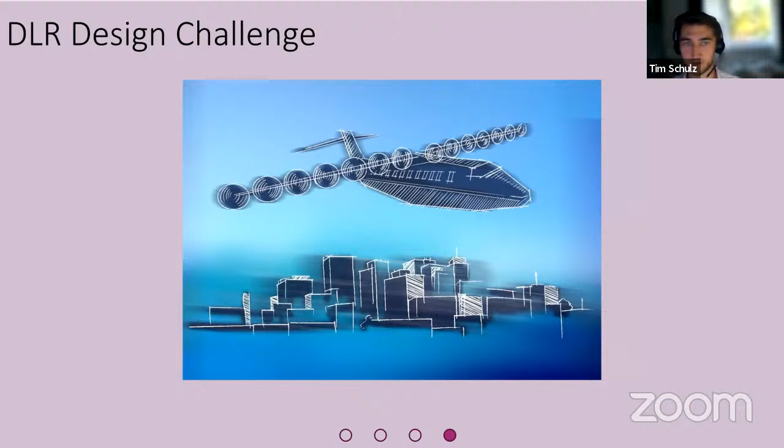A few years later, they had to design a rural aircraft to transport 6 to 10 people to slightly larger airports. Last year, students had to design a drone to regain internet connection in catastrophic areas. And as just introduced, this year was all about regional and short-haul design, which brings us to our solution.

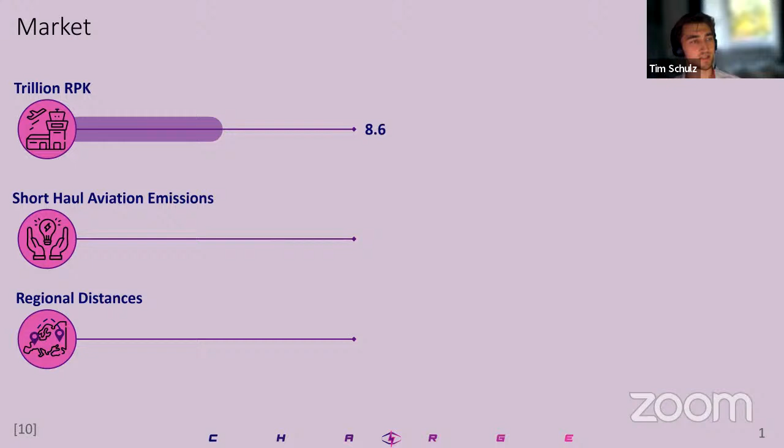Before we started to design a new aircraft, we had to figure out if there's any market for it. As stated last year, the aviation industry is still kind of recovering from the COVID crisis but will handle the challenge with ease, and is expected to reach about double the revenue passenger kilometers by 2050 compared to last year — plenty of market for us and for aircraft.

That just leaves the question: what market exactly? One of our main focuses is climate change, and roughly one-third of all aviation emissions are emitted on short-haul and domestic flights, often covering less than 1,000 kilometers. That's about the range you can see here on the map.

An example network for those ranges was provided by this year's DLR Design Challenge, and you might notice some routes extend far beyond the 1,000 kilometers just mentioned. Northern Germany is quite rainy and dark, and the winter isn't that nice, so it's tempting to go south to warm Italy. But it's hard to design an aircraft for such a variation of ranges.

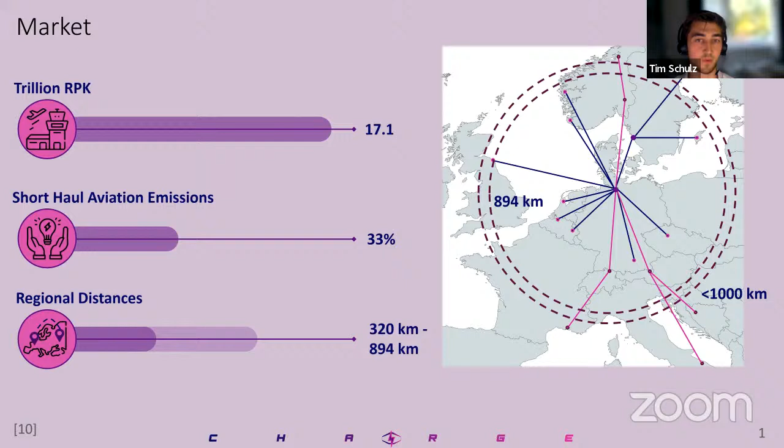Which is why we were allowed to consider stopover flights, reducing the actual required range to about 900 kilometers — roughly the distance of Hamburg to Edinburgh. It's noticeable that for all those ranges and routes, the DLR provided within the task an amount of route demand and a minimum and maximum amount of takeoff and landing slots at the airports, which predetermined the aircraft to about 60 to 120 passengers. That's going to be important later on.

But first, let's go back to the routes — and how are we going to fly those climate friendly?

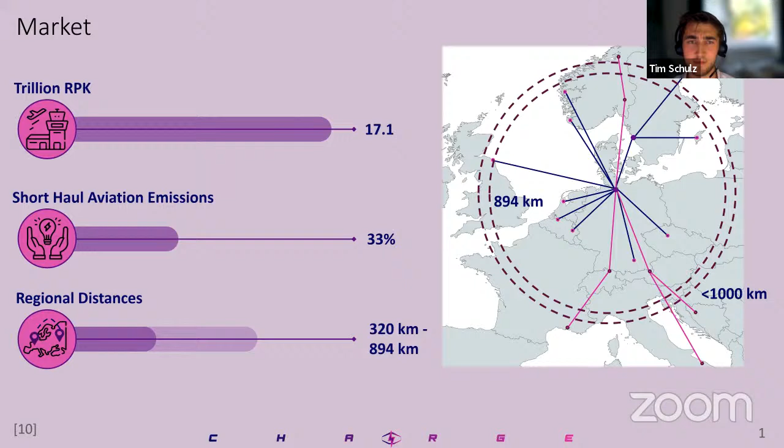It's prognosed that by 2050 air travel will increase, and sadly the greenhouse emissions will roughly double. So it's one of the only sectors that by 2050 will actually have a growth in CO2. But the EU is trying to combat that.

By 2050, the EU wants to use 70% sustainable aviation fuels for air travel. There's a legislative act called the Refuel EU Act, and according to that act, only hydrogen and sustainable aviation fuels are considered CO2 neutral. But it's still only 70% of sustainable aviation fuels. So by 2050 and after that, commercial aviation in the EU wouldn't be exactly CO2 neutral.

If you look at another energy carrier, namely electricity, it's prognosed that by 2050, up to 94% of energy generation in the EU would be renewable, so with a very low CO2 footprint. So it can be assumed that by 2050, electricity is a good source for CO2-free energy.

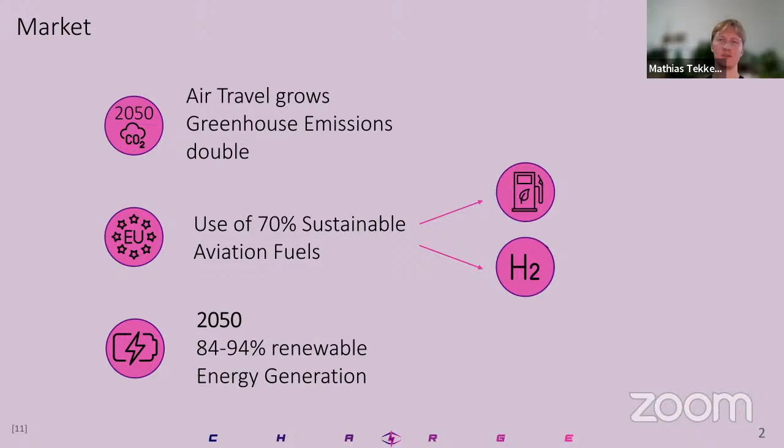Let's also look at the efficiencies of these energy carriers in more detail. In the assignment, we were given to use either SAF, hydrogen, or electricity. On the left side, it shows the total grid-to-shaft efficiency of these energy carriers. It's noticeable that sustainable aviation fuels have quite a low energy efficiency of up to 20%. Hydrogen is marginally better, up to 30%. But battery electric is the most efficient with 77% total efficiency.

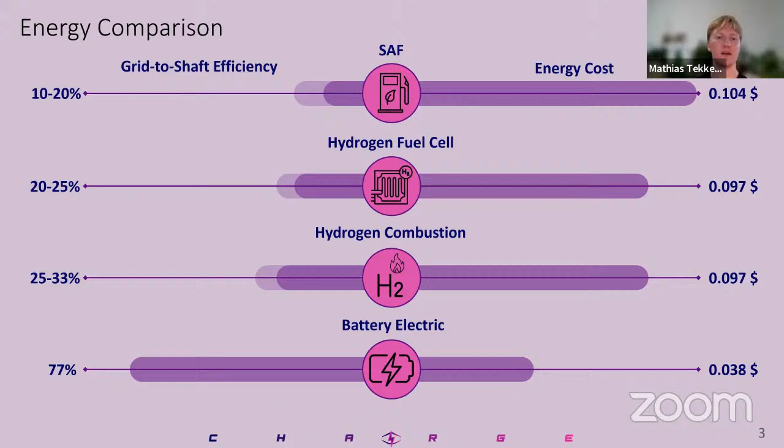Also, when looking on the right side for the energy costs that were also given to us in the assignment, it's noticeable that battery electric is almost a third of the price of hydrogen. So in combination, it's an energy carrier that has high efficiency and also low cost. So we were also asking, what do we need for energy, for battery electric flight? What is actually technically necessary?

To answer that, we used the Breguet approximation formula to calculate the final MTOM of a battery electric aircraft, depending on the usable specific energy of the batteries and also the empty mass fraction of the whole plane. On the left side, you see the 3D diagram of this. It's noticeable that at lower usable specific energies, the MTOM increases rapidly. This is explained simply because the mass of the battery increases, and you have to compensate this increase with a further increase - it's just a slippery slope.

To combat this, we limited our design to 40 tons final MTOM and assumed that the empty mass fraction would be around 50%. From there, we deducted that the minimum usable specific energy for our battery packs should be 700 watt-hours per kilogram, and the feasible empty mass fraction of the aircraft is at 50%.

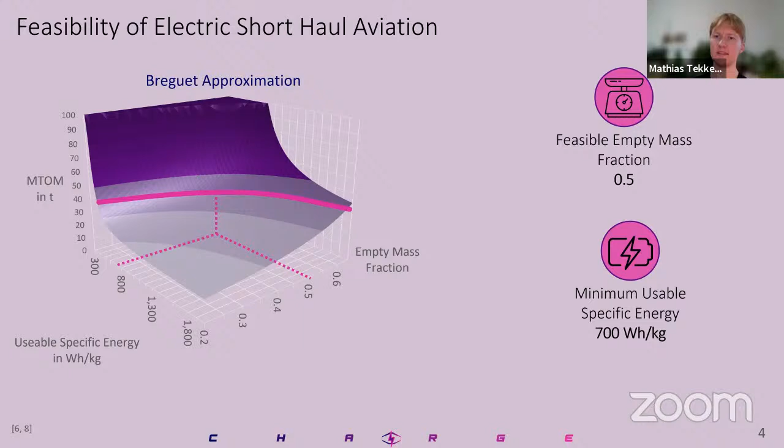But the task wasn't to design an aircraft for today. It was for 2050. And by 2050, the outlook is quite different.

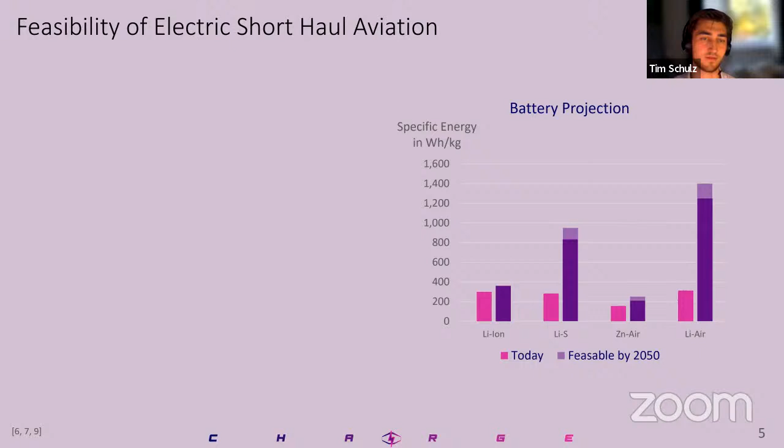Well, for once, there's lithium sulfur. Those batteries aren't far enough developed by 2050 for our aircraft. But there's another alternative, lithium air. Those batteries bind oxygen from the surrounding air while emitting energy and are expected to reach up to 1400 watt-hours per kilogram of specific energy in the battery cell by 2050, which is far more than we require for a feasible battery electric aircraft. So to come back to Matthias' question from before, what is necessary for a battery electric aircraft? Lithium air batteries, and they will be there by 2050.

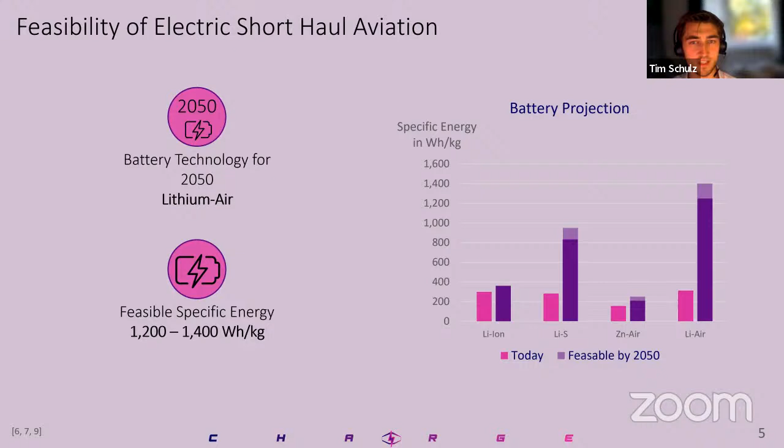So this is why I can introduce charge.

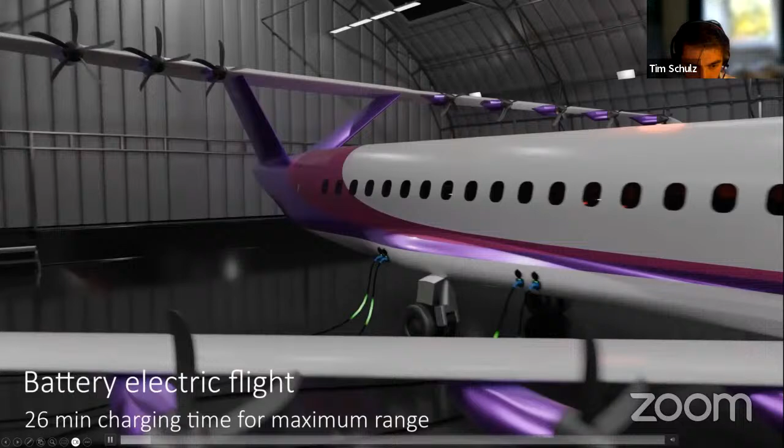Oh, I'm sorry. So I think now you should.

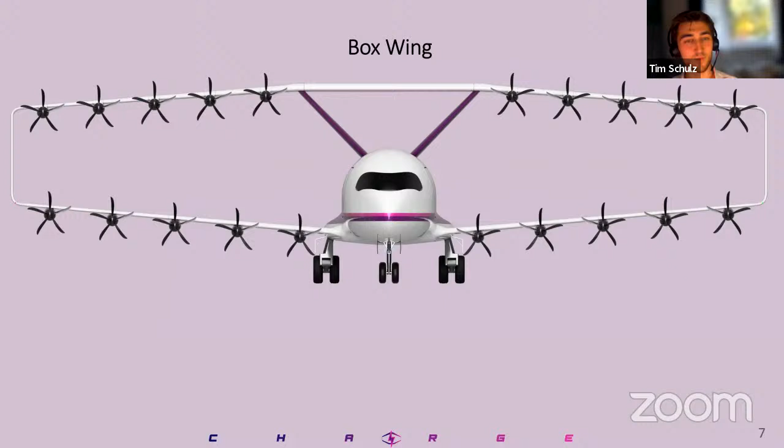Charge is our carbon neutral, high efficiency aircraft for regional electric flight. The marvelous design is characterized by a futuristic looking box wing, which on one hand provides an excellent in-flight efficiency, but on the other hand, keeping the wingspan quite low.

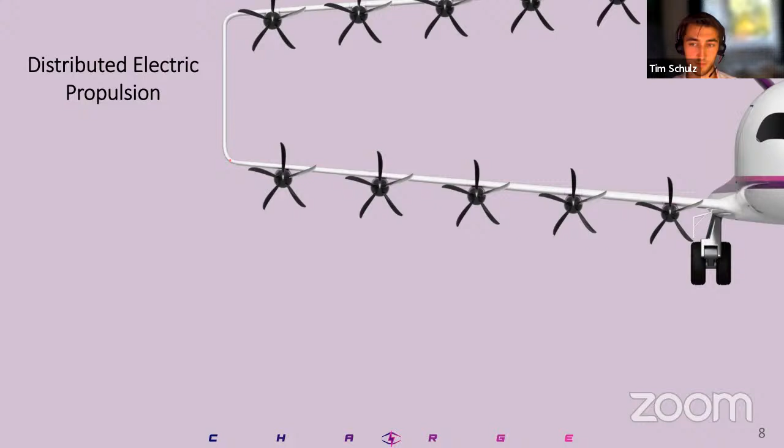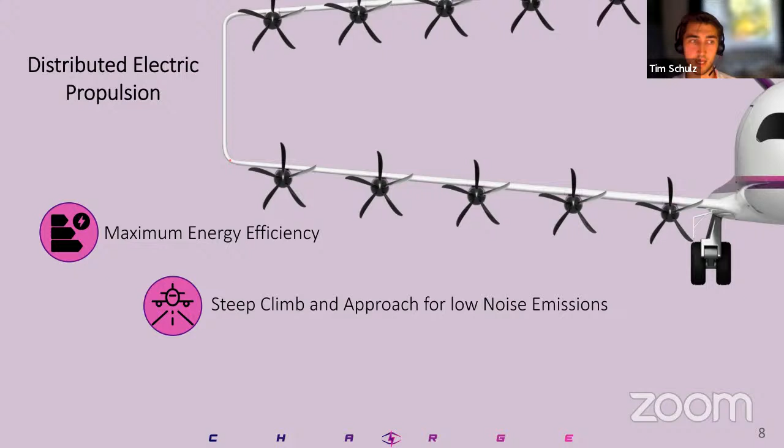Along the wing's edges, spread out 20 propellers, providing us with distributed electric propulsion, which leads to a maximized energy efficiency, even during climb and approach, which we do quite steep to reduce noise emissions as far as possible. And since we're using electrical motors, they don't require much maintenance and can cut some costs in this department.

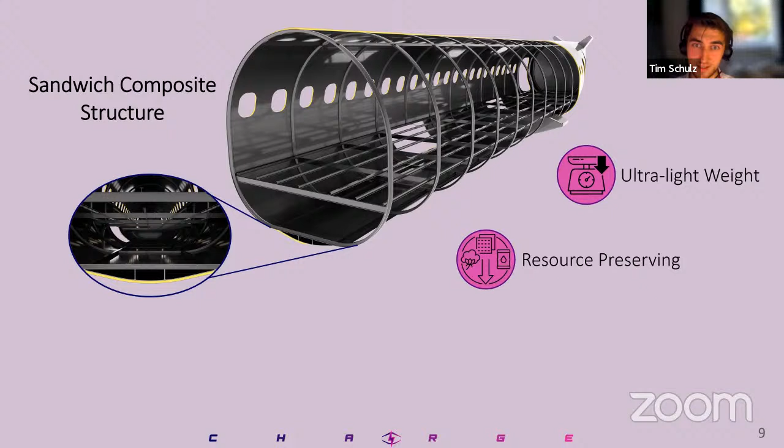Strapped to the wing is our fuselage, built with a sandwich composite structure, which is ultra lightweight and preserves a lot of resources. And if technology is ready by 2050, we are opting to enhance or even substitute as many carbon fibers with natural fibers as possible to reduce waste, further reduce emissions, and protect the environment as much as we can. But those are just some empty words.

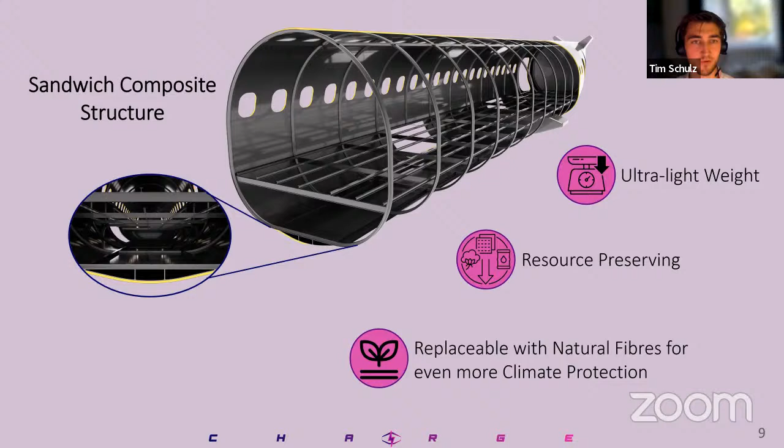We're engineers, of course. We calculated why Charge is so ideal for its use case.

As mentioned before, we were not given a specific configuration for the aircraft, but rather a route network and the amount of passengers we had to serve. Based on that, we could have a configuration between 60 or 120 passengers in each plane. The question was, how do we calculate the perfect design for this design mission?

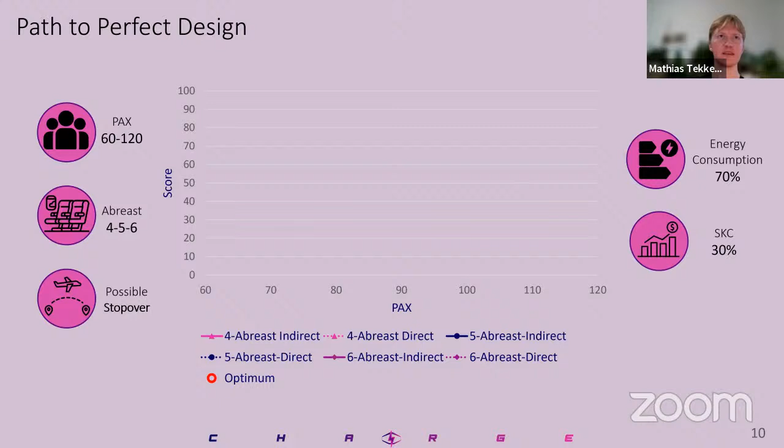We also developed a scoring system to score the configuration. We weighed energy consumption with 70% and the seat kilometer cost by 30%. And in the final configuration, the most efficient was a 110 passenger configuration using the indirect flight network.

It's also noticeable that there are two trends on this chart. Firstly, with the increase in passenger numbers, the scoring gets better as the aircraft is more energy efficient per passenger kilometer. It's also noticeable that all the indirect flight configurations with the max range of 894 kilometers have a way better scoring than the direct flight networks.

This can be explained by the increase of the battery mass that's required to fly the 1,400 kilometers compared to the 894 kilometers.

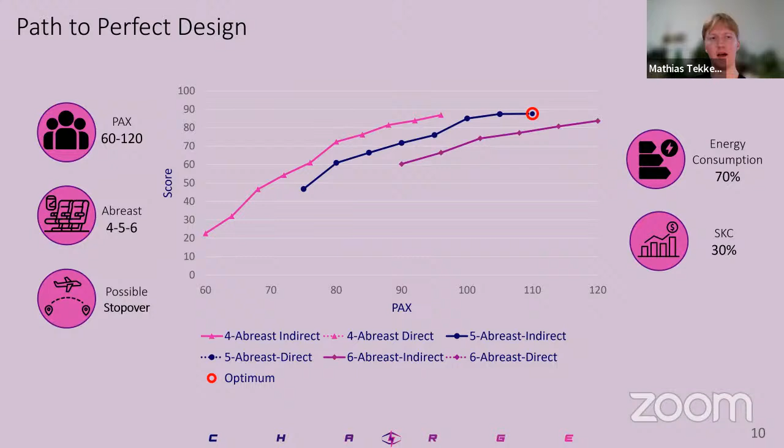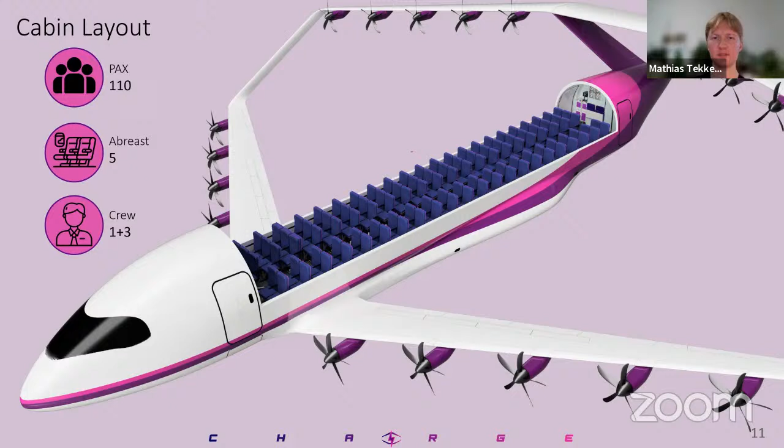Let's have a look how the airplane configuration looks like in detail. Here is shown a cross-section of the aircraft in 5 abreast, 3+2 seating order. In total, it can carry 110 passengers, and it has a capability for single pilot operations, so we only need one pilot at the front.

In the cabin, the aircraft would have 3 crew members to assist the passengers during their flight or in any emergency cases. Otherwise, it's quite a conventional commercial aircraft with a few galleys and a few bathrooms at the front and back.

But let's also look at the outside dimensions. Because of the box wing design, we were able to limit the wingspan to 28 meters. The aircraft is in the ICAO Aerodrome Category C, which is very useful for our flight network as we have to service smaller regional airports. Otherwise, the aircraft is roughly 31 meters long and just under 8 meters tall.

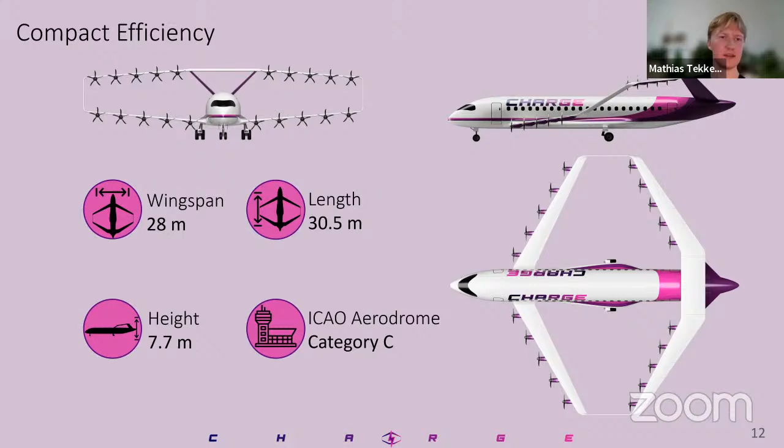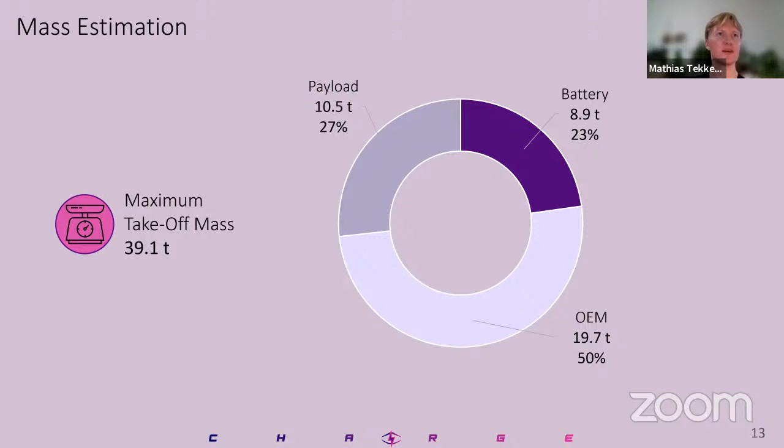When we look in more detail at the mass of the aircraft, we see that we did reach our goal of staying under 40,000 kg MTOM, as we tried to during our feasibility study with the Breguet approximation. Only a fourth of the aircraft's final mass is actually the battery, with roughly 9 tons. Interestingly, we also stayed at 50% operating empty mass, which we also assumed in our first approximations.

But let's look in more detail at the batteries. The batteries have a total energy density on the pack level of 1,200 watt-hours per kilogram. But if we consider depth of discharge protection and degradation, the usable energy density is 720 watt-hours per kilogram, above the minimum that's feasible for an electric aircraft design.

The lithium-air batteries are divided into 4 battery packs under the floor of the cabin, and they can be easily removed by openings on the starboard side. They can be charged over 4 charging ports, so each pack is charged individually. For the maximum range of 900 kilometers, it only takes 26 minutes to charge them.

The batteries themselves are quite safe as they cannot self-inflame, but each pack is still self-contained and also has an extinguishing system in case of emergencies.

We also took into consideration that every 1,500 full cycles, the batteries have to be exchanged as their charge holding capability falls below the requirement to fly the aircraft at longer ranges. But this is not a considerable issue as they can be changed every 23 months during the overall C-check of the aircraft and doesn't have any operational issues.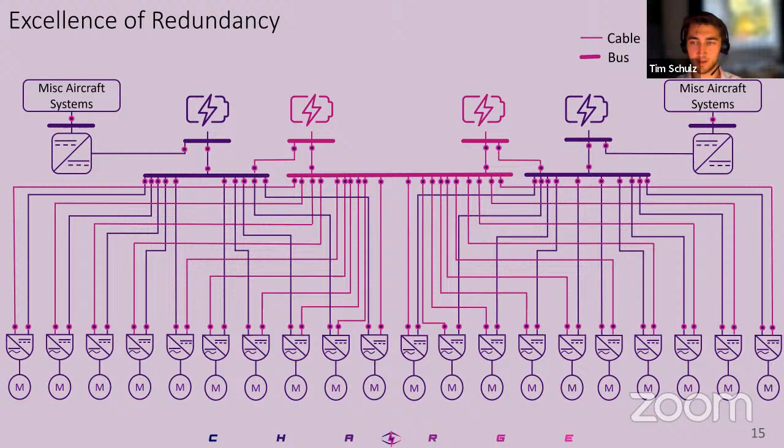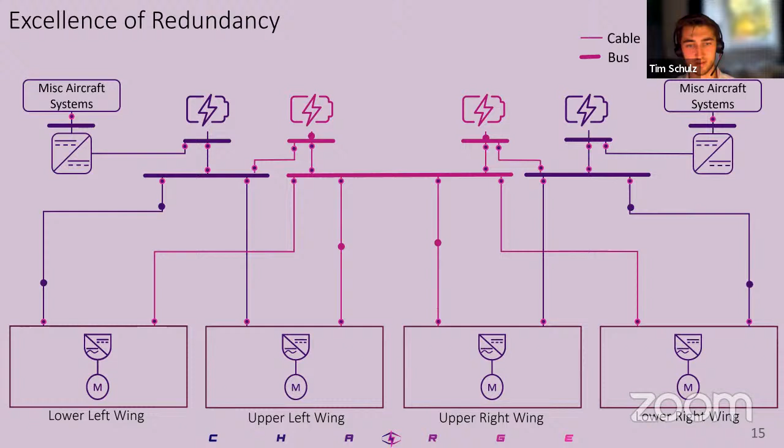Right now, we're assuming there's just one motor per wing, and let's see how it's redundant. Right now, every battery pack is powering its motors, since there are 4 wings, 4 batteries, 4 motors. It works this way. But let's just assume one battery fails. It's highly unlikely, but let's have a look.

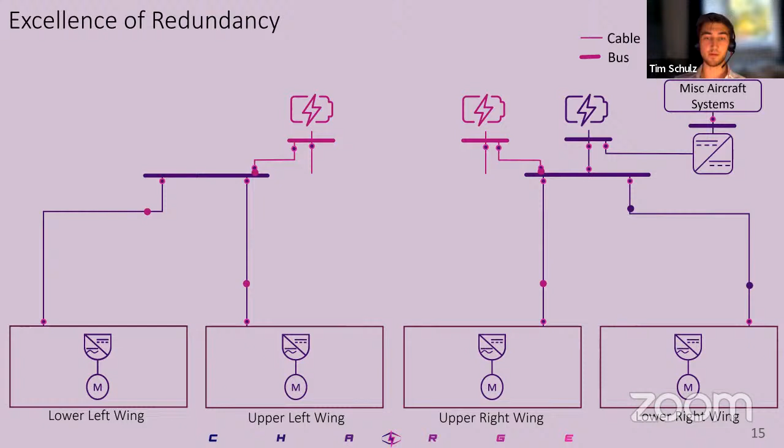Even if a battery fails, you would still be able to operate all 20 motors on full power. And in this configuration, we could even say the center bus fails as well, and we would still be able to operate Charge regardless of the damage, which makes us very redundant.

But let's have a look at Charge operation. While flying throughout Europe, since that was our task given by the DLR, with about 900 kilometers of range, we had to overcome some obstacles like the Alps, which is why we chose an initial cruise altitude of about 7.5 kilometers and a cruise speed of Mach 0.57. On the ground, we're taking off in just short over 1400 meters, thanks to the installed power of 6.24 megawatts, which enables us to operate even from the smaller airports, like the regional ones we had to operate from. And as just mentioned, our charging time is about 12 to 26 minutes, depending on the range previously flown.

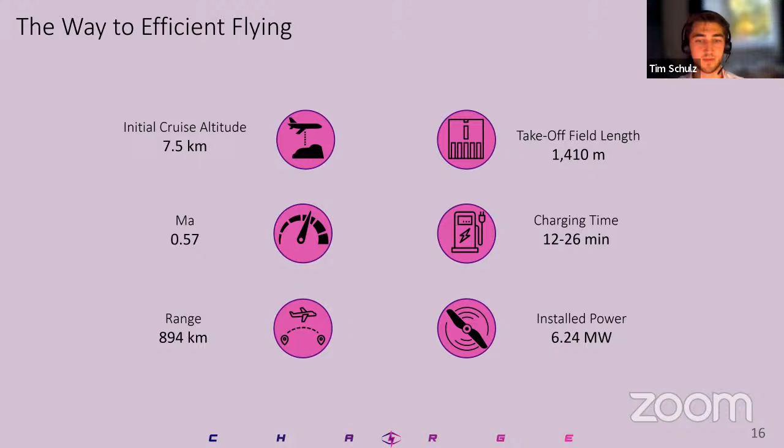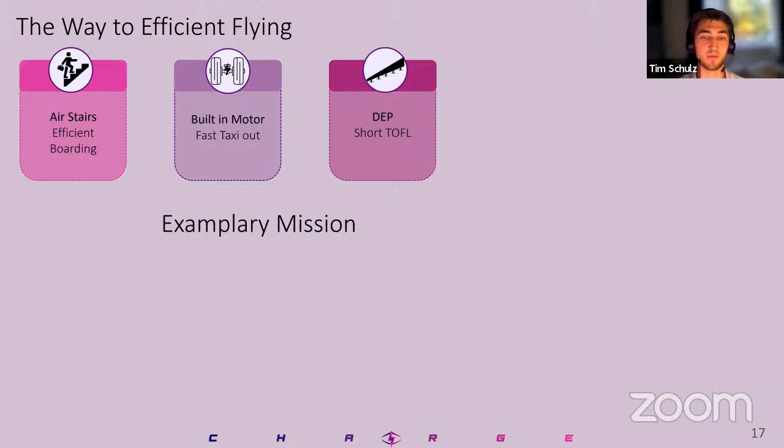In the air, we're very efficient. Economically, thanks to the single pilot operation, and ecologically, thanks to the very efficient box wing and the morphing tail section right in between the V-tail.

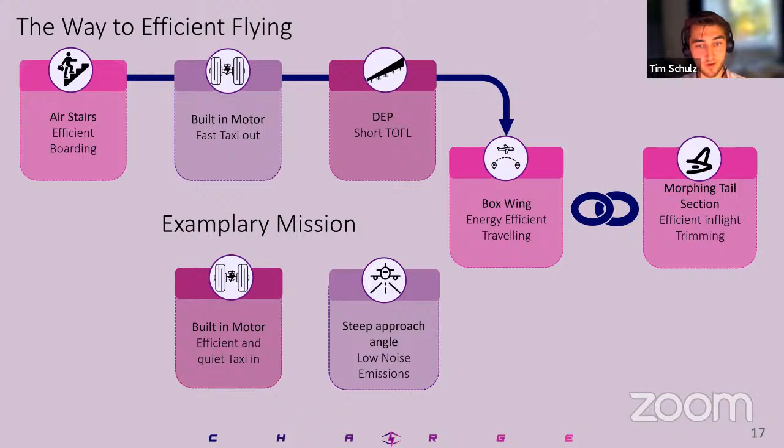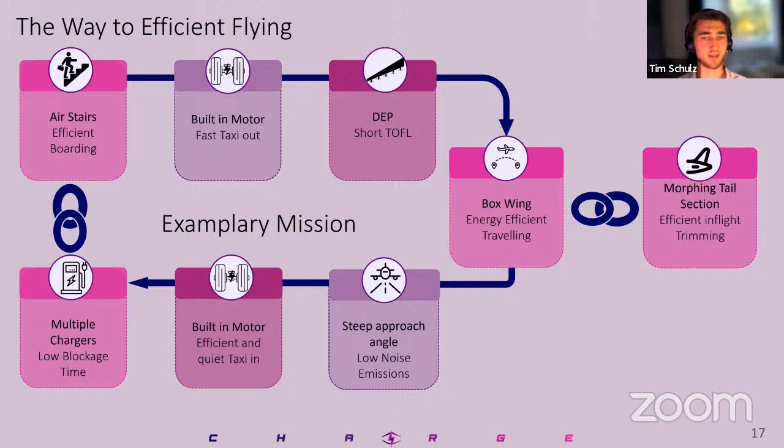After flying, even though it was very nice, somewhere we have to land, we land, of course, again very steep to reduce noise emissions as far as possible. After that, we taxi back to the gate or airfield position, and while boarding, of course, we charge, which is a huge advantage of battery electric flying compared to other energy sources. But again, those are just some words about Charge's mission. Let's have a look at some numbers.

So to fill our passenger requirements in the given network, we need 4 planes in total to cover the whole network. On average, 102 passengers are transported in each plane, which is over 90% of a fulfillment rate of the 110 passengers in total. 90% of the time, the aircraft are utilized, which leaves a nice margin for any delays.

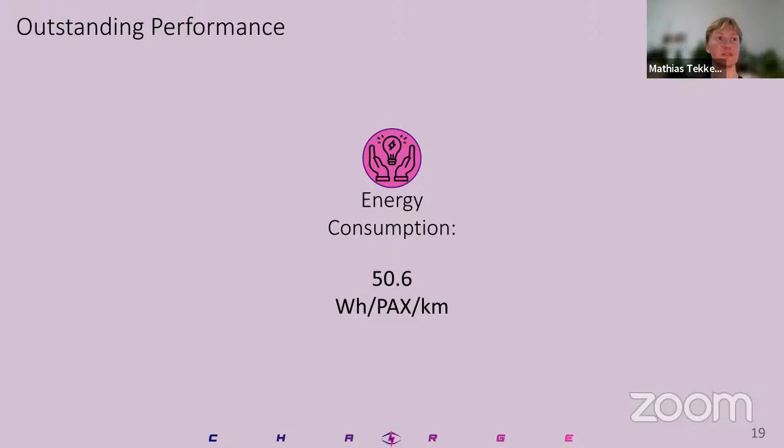But let's look more in depth at the energy consumption, which was one of the main criteria for our aircraft design. This is at 51 watt-hours per passenger kilometer, which is considerably lower than comparable aircraft like the Dash 8, which uses over 6 times more energy than Charge would when looking at the energy equivalent.

We were also curious how our aircraft configuration compares to other transport systems, like fast trains or electric cars. Even in this case, the aircraft uses less energy per passenger kilometer than an electric train, and almost 3 times less than an electric car. This is partly also explained by the higher usage rate of the aircraft compared to trains and cars, which are sometimes only half filled.

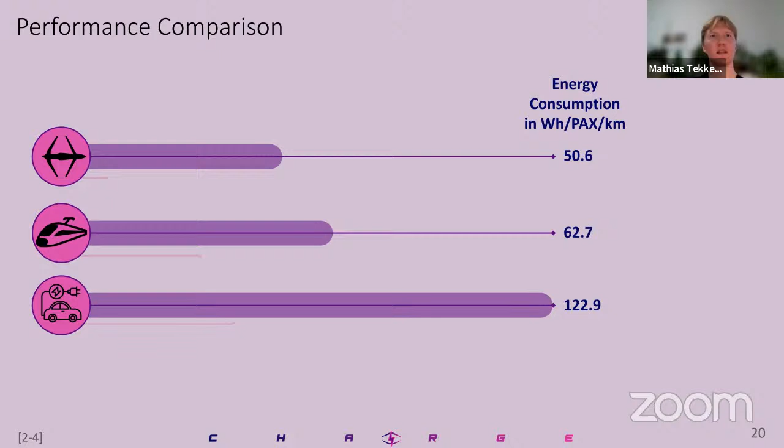We were also looking at how this compares time-wise to trains and cars. If we look at one of our connections in the network, Hamburg-Munich, which is roughly 600 kilometers from the north of Germany to the south of Germany, our plane could do that connection in slightly over an hour, while the train would take over 5 hours, and the car roughly 7 hours, if there aren't any traffic jams or delays.

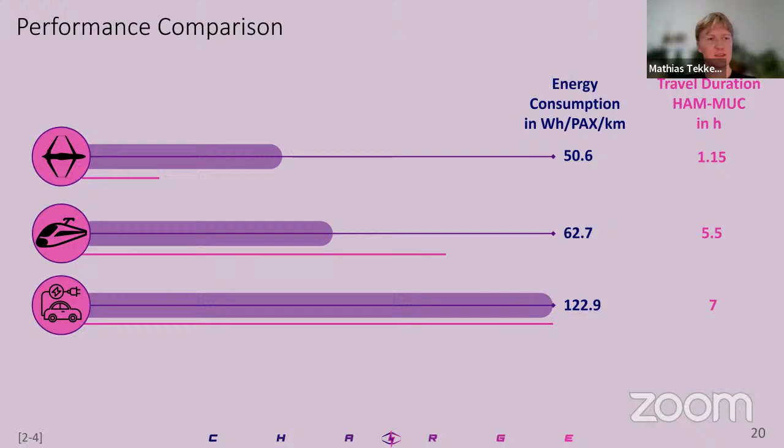So if you would summarize our concept, we have shown that battery electric flight is, by 2050, at least in Europe, the only true zero-emission commercial flight option. All of the other options, hydrogen or SAF, would probably have a higher CO2 footprint.

But to achieve this, we need a highly efficient design, which is possible with the box wing and distributed electric propulsion. Even though it might sound expensive to build a battery electric aircraft that only flies 900 kilometers, we have shown that due to the high efficiency and ease of operations of our configuration, it's also economical compared to other aircraft in its class, or even aircraft like the Dash 8 nowadays.

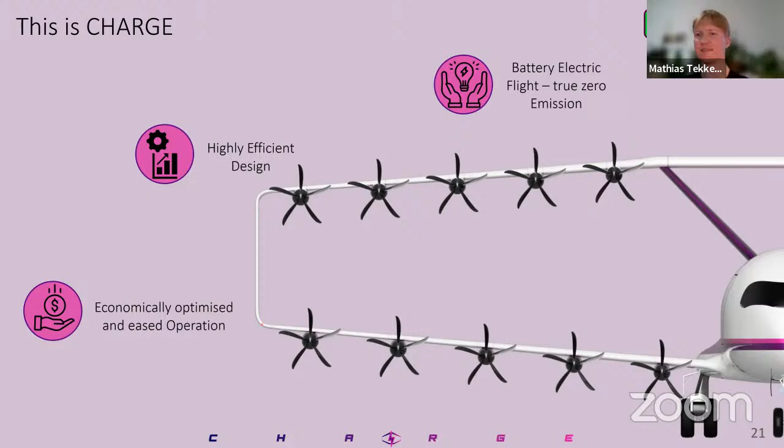So yeah, this was our design, and we were very glad we were able to present it. Well, of course, we weren't perfect.

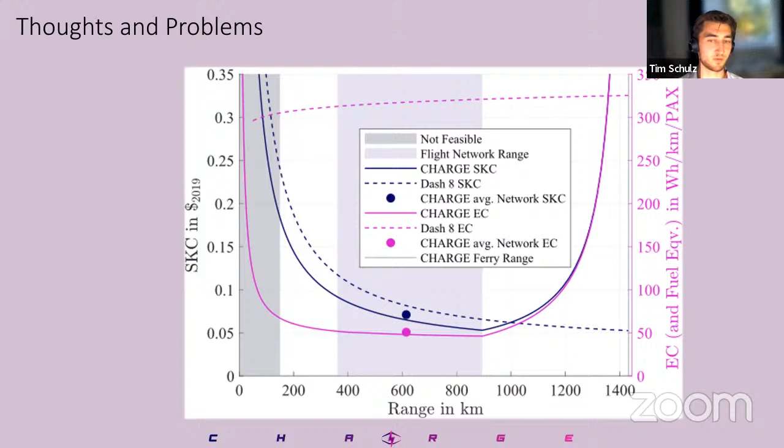There are some considerations and flaws we saw later on. For example, on this graph, we noticed we could shift the graph a little to the left to further increase efficiency, especially cost-wise, since our average network utilization isn't at the optimum, and there could be gains made. As well, the box wing concept in general is kind of hard to design flight-mechanically, as well as it's not able to stretch or shrink the aircraft because of those weird flight mechanics and hard to design.

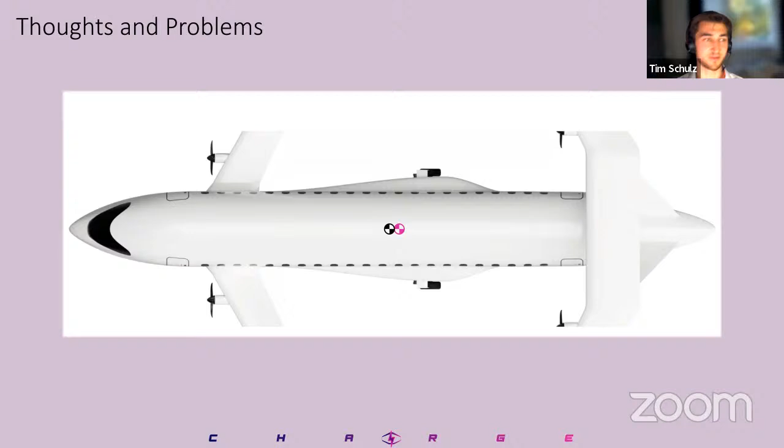And at last, because the batteries take up a lot of space, there isn't any room left for luggage, which wasn't given as a requirement by the DLR, but short regional flights often transport people who then go on long haul flights. And for those flights, you need luggage, big luggage. There's no space on the aircraft for that right now.

Of course, you could argue that in the future, as the battery energy gets more dense, there could be some room for those luggage compartments while keeping the range of the aircraft the same. But that's something we haven't looked at, and that would be something for the future.

Thank you very much, Tim and Matthias. And before we have maybe some questions from the audience, thank you so much for your time, because this is the future, definitely. We can maybe discuss about when we will have the technology, but definitely if we want zero emission, that is a fact. Yeah, and well, I have some questions, while I expect that some others will ask another.

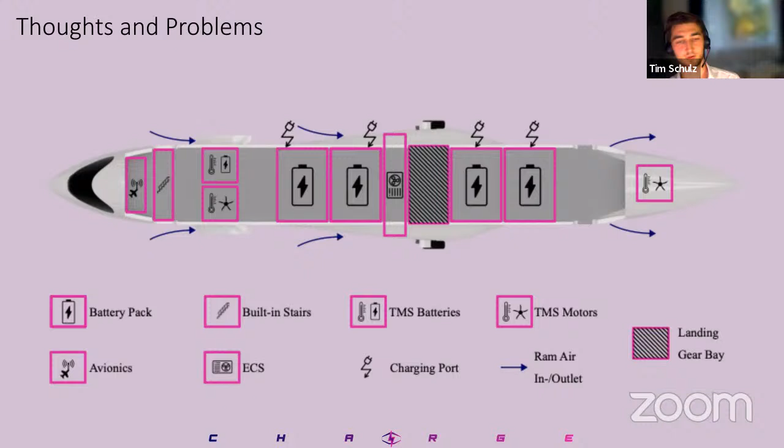In this case, we were also searching the literature for high efficiency electric engines for aviation uses. And what we saw was that until 2050, in this time frame, it's very likely that the maximum power of these very high efficient electric motors wouldn't be enough to just use 2 or 4. So that was one requirement.

And then we were thinking, okay, if we have to use smaller ones, why don't we try a distributed electric propulsion configuration, which during the starting phase, because of the high thrust of the engines, would help the aircraft achieve a higher angle of attack to take off. So we also have this steep climb and steep descent requirement for lower noise emissions.

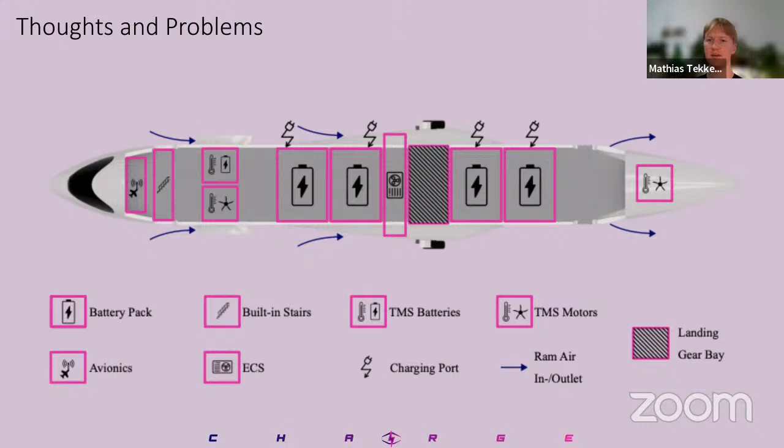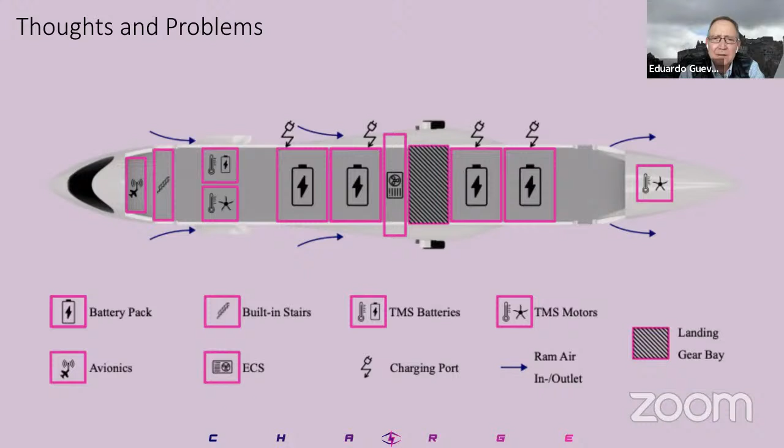Okay, great, another question from the audience. If batteries can't reach 1200 watt-hours per kilogram by 2050, let's say it reaches 900, do you think it will still be feasible to make electric regional planes? Well, I think it's kind of hard, but we started calculating the aircraft with about 900 watt-hours per kilogram.

But as you can see here on the Breguet equation, for 900, we would either have to go with quite unrealistic empty mass fractions, or consider a higher MTOM. And with a higher MTOM, we need more batteries, and it's a down cycle. So it's going to be hard with 900 watt-hours. I think we need at least 1,000 to 1,100.

With less, you would have to work with range extenders since the divert ranges are so huge that it's hard for the batteries to do this. There could be some ways, like if you have to divert, to go into the depth of discharge, which could give you 20% more battery capacity, which we didn't consider. We would have never touched those last 20%. So it could go into that direction, I'm not sure. But yeah, I think 900 is the border where you would have to start to work with range extenders and SAFs.

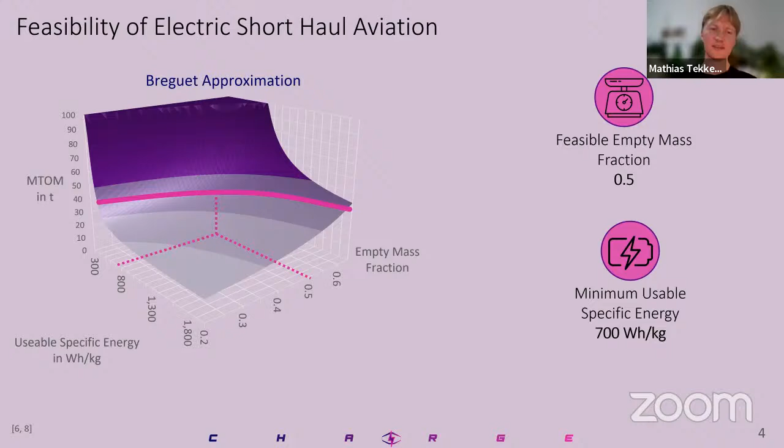That's a good one, because I think we have two main concepts in the safety aspect. One, we have single pilot operations, which is even nowadays heavily discussed in the commercial aviation sector, if it's even legally possible to do it, even in the future, even though technically it might be. In our case, even if it's a dual pilot operation, it wouldn't be a killer for this concept.

Another thing we have is the whole electronic system, including the batteries. So we do assume that by 2050, the lithium-air batteries, which are now still in the laboratory, would be usable and also safely usable. They do have advantages compared to lithium-ion.

And then also the whole issue with the high power electronics that would be necessary for electric aircraft. These are components that haven't been developed yet, because there's no need for commercial aviation for that yet. And they would also have to be strictly tested because of the high voltages, high currents and high powers that would have to go through the whole system.

This is also one of the things we saw in our technology readiness level research, that the batteries have a quite low readiness level nowadays. The other option, fiber composite fuselage, is not that high tech. The A350 has that. Airbus is doing research with thermoplastics.

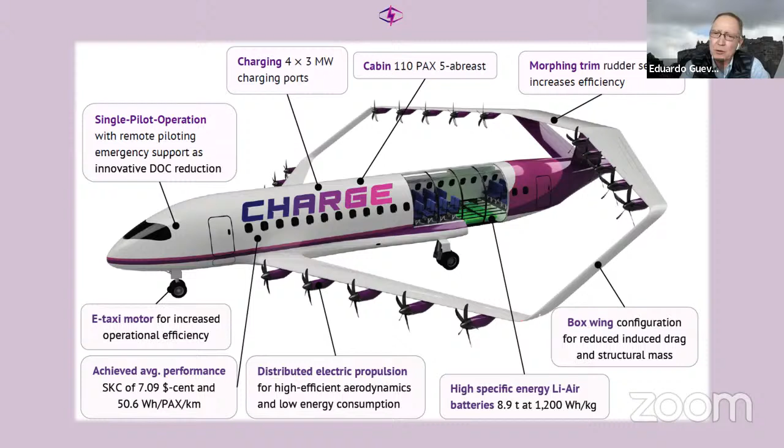Okay, great, indeed it's a very interesting project. And knowing the situation by now, how do you think a foreign country, foreign industries out of Europe—I'm saying out of Europe for practical reasons—can participate in this kind of project? Is there something just for European countries, some agreement? I ask because in the United States they are putting about $1 billion to fund projects like this, NASA and the government. So my question is that.

Difficult one, because you're right that the DLR is very German specific. This competition was only for German universities. There used to be one 10 years ago that was together with NASA, but they stopped it. And otherwise, for universities outside of Europe...

I think one option, what is common in German universities—I don't know for others—is that students themselves come together and form a group or research group, and then with the help of the university faculties and personnel, they're able to do their own small aircraft or drones and research topics like this, or flight mechanics and flight control research. That's something we also have in our university, smaller student projects that come together. They get some financial aid from the university, but they also ask companies for sponsorships, and then do this work themselves, write papers about it, or get some credits for it.